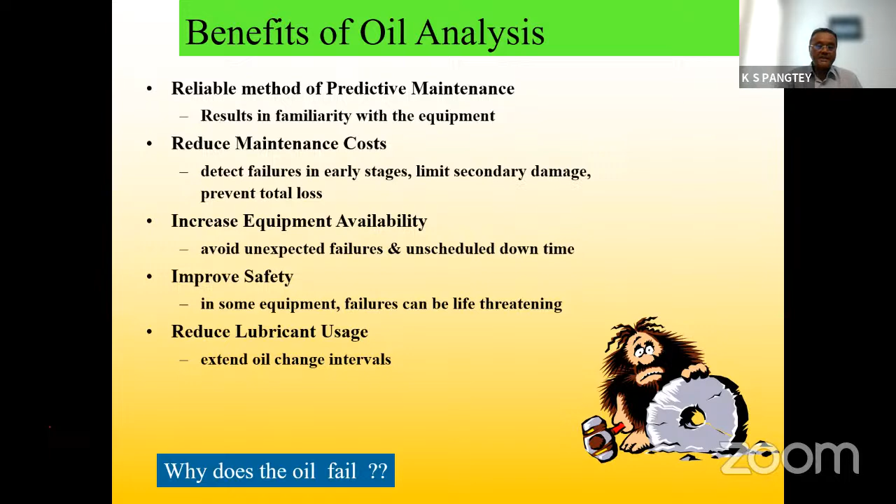Lubrication root cause - everybody knows lubrication failure, contamination, additive depletion, mechanical failure. As a mechanical engineer, my role is here - please see misalignment, faulty installation, overheating, many more. These are very small things which you have to look after. It might be in your maintenance schedule, but you have to slightly modify it as per the demand and requirement of the industry nowadays.

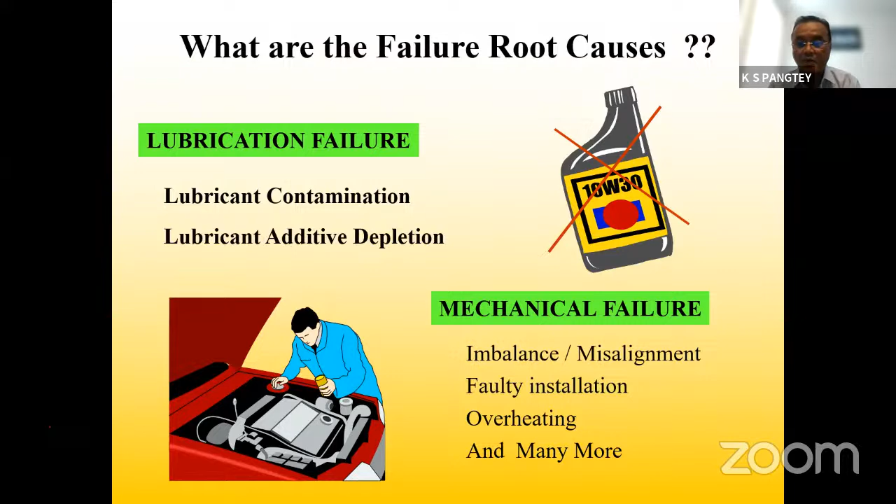Earlier, oil was very cheap, 50 rupees a liter, 40 rupees a liter. There was no problem. Industry is same, please mind, please note this. Industry is same, equipments are same, everything is same. From 40 rupees, today we are selling at 200 rupees a liter, because this is the demand, this is the time that has come. You have to look at all this oil, because oil means a lot - this is the heart of the plant. Oil is just like a blood sample report.

You have to see all the parameters. If something is happening, some elements are coming, something is coming in your oil which is not desired, then you have to look into this. Whenever I talk about this contamination process, machinery oils can be contaminated by a variety of materials that are measurable by oil analysis.

From the naked eye you cannot see, gentlemen, because this is not possible - soot, processed material, wear metals, water, glycols, fuel, processed chemicals, wrong oil - this is not possible to detect at your end. You cannot see it with your naked eye, because there is a special process and procedure needed.

You have to take help of condition monitoring. Ask your oil supplier, whosoever it is - I'm not talking about a particular industry, company or oil supplier - because this is your prime responsibility and prime requirement. You can ask before buying the product. Ask your supplier, can you give me condition monitoring for the product?

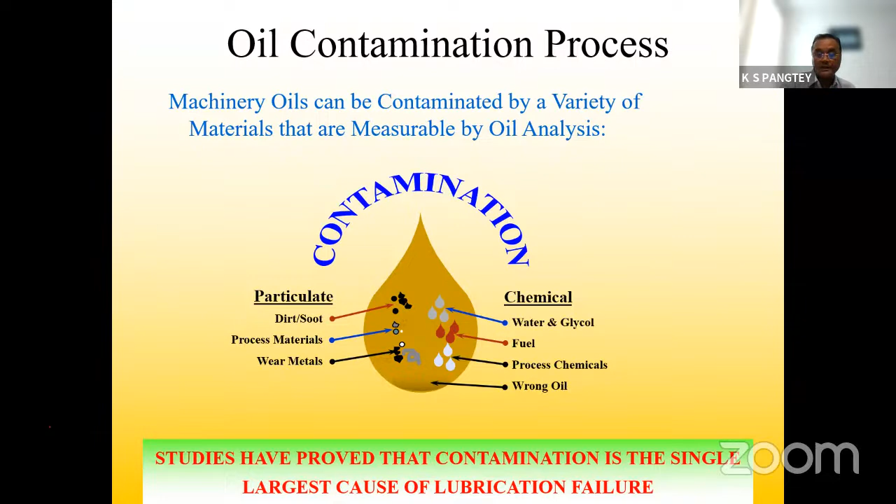If you are doing condition monitoring on a regular basis, you will come to know the health of the oil. There are so many issues, as I said earlier - additive depletion, viscosity index shearing, oxidation of fuel, sulfation, nitration, soot.

Now we are talking about CNG engines also. For general public knowledge, we work on the Otto cycle for MS petrol engine - spark ignition engine, and compression ignition engine. But all these CNG engines, they are also spark ignition, but they work on a different cycle - some call it stoichiometric cycle, some call it something different. But the efficiency of CNG vehicles is less compared to our petrol and diesel engines.

But these gaseous fuels - there is no liquid, so they run at very high temperature. So thermal stress - when I talk about stress, heat, everything is there, because there is no liquid fuel, so cooling to your wall is not possible. And soot deposits on the wall.

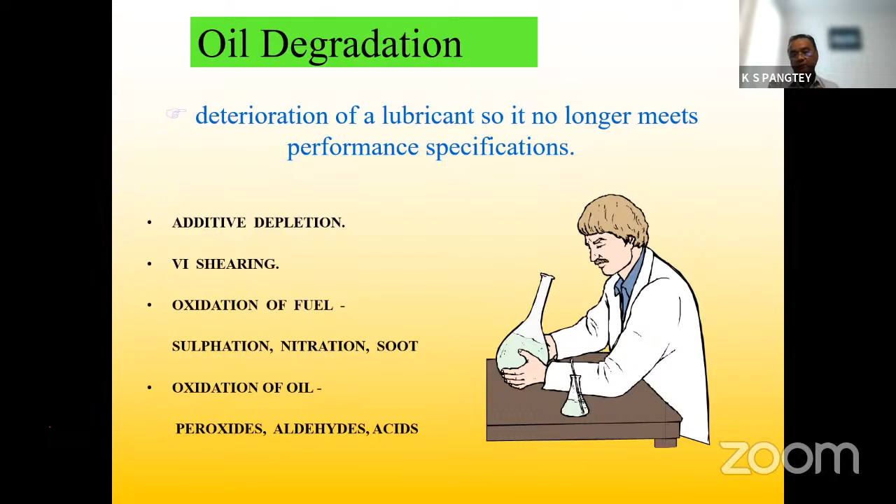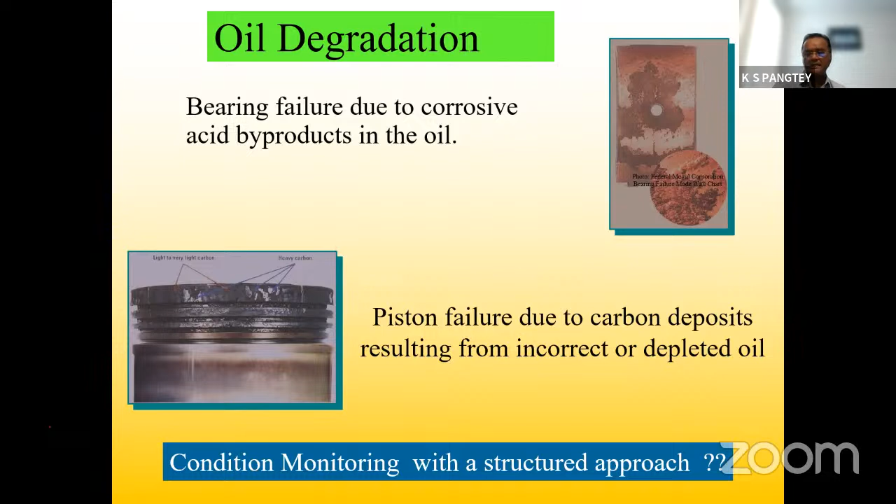This is a live example of condition monitoring in industries. See, bearing failure due to corrosive acid byproducts in the oil. See how these are taken care of by condition monitoring, because we come to know in advance. These are the worst conditions. You put your oil in the vehicle, in the engines, and if we have not taken care, these are the results - from thermal stress and thermal degradation, high temperature, everything is there.

Condition monitoring is not possible from the oil manufacturer or supplier alone. This is teamwork. Everybody has to take care - oil consumer, original equipment manufacturer, and oil supplier. The oil supplier is the only one doing condition monitoring, but without the support of oil consumers and OEM, this is not possible.

Now this is your right - you have to ask your supplier. You buy the product, so ask them, are you taking care of my turbine? My turbine consists of 35,000 liters of oil, gentlemen. This is costing me something around 70 lakhs of rupees for one turbine. I have seen a series of turbines, 5 turbines, 2 crores of rupees worth of oil. For every supplier of condition monitoring, please ask your supplier, ask your equipment engineer, because this is the prime responsibility of the supplier to take care of your equipment.

Mr. Sanjay was telling me, sir, now people are not taking care, oil suppliers are just giving the product and running away. No, this is the prime responsibility. As a citizen of India, this is my prime responsibility to take care of my consumer. I have to give them condition monitoring. I'm not talking about myself alone - when I say 'I', I mean the oil industry, oil supply, the prime industry.

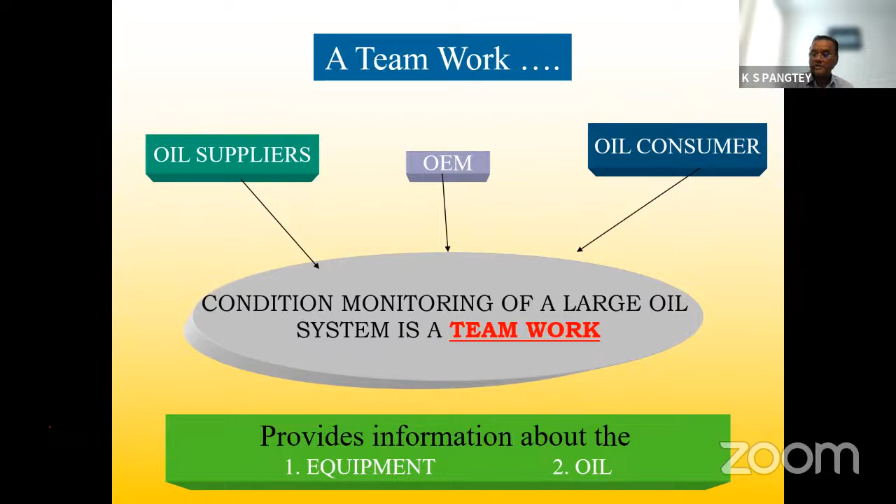This is a service you can demand from your supplier, because oil condition monitoring takes care of your equipment and oil. Oh God, just see - this is the process I was telling you about, everyone - the oil analysis flow diagram. I'll leave this here for just one minute, you just have a look.

How many controls are there? How many recommendations are there? This gives the complete example of whatever you are getting - iron, aluminum, chromium, copper, silica, lead, tin - everything is coming. Not everything comes from the oil; something is coming from your equipment also, your bearing also. Please keep in mind, whatever bearing is giving you separation of film to avoid metal to metal contact, this is in microns - you cannot see it even with your eyes.

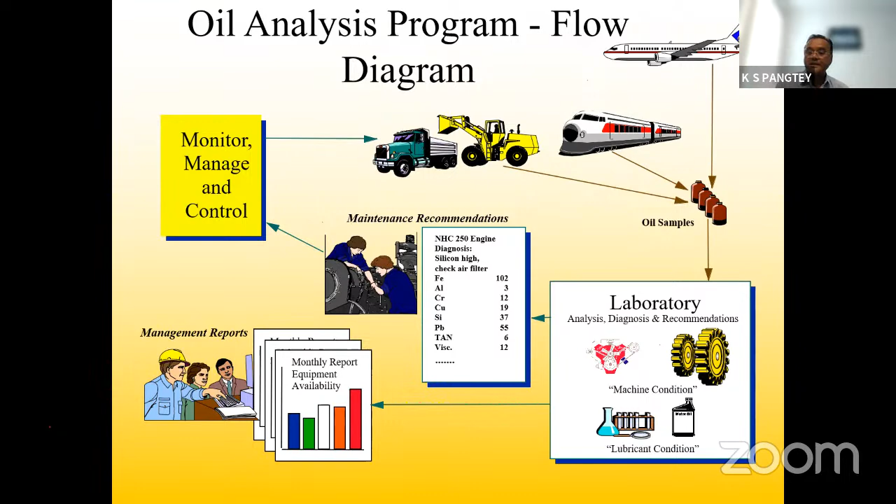Not possible to see directly. Condition monitoring is taking care of your health. Management reports are there, maintenance people are there, analysis are there, everything is there. For doing condition monitoring, you have to do condition monitoring scheduling - draw samples, draw vital parameters, do on-site tests, do lab analysis, and interpretation of test reports, because it's very difficult.

Suppose I give you one report - see, heart specialists are there, liver specialists are there, eye specialists are there. Everybody has specialists in the hospital. Like that only, in this oil condition monitoring report, if I give you a simple report, you won't be able to understand what I'm saying. Interpretation of results is very much required in an oil condition monitoring program.

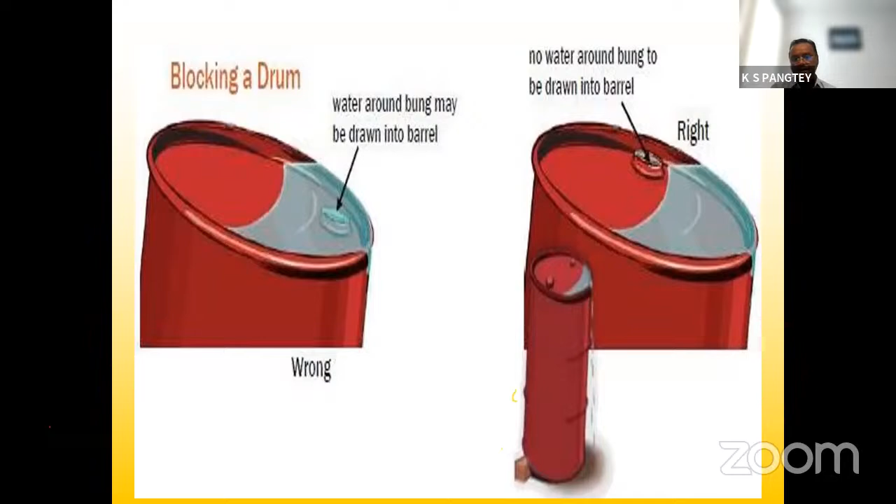All this water will come to your product. So the 3 o'clock, 9 o'clock position is important because, due to winter and the day-night cycle, some breathing is taking place. There is no way to take care of this or avoid it, except keeping the barrel at 3 o'clock, 9 o'clock.

Why am I saying this? Because of the bungs. There is one mini bung and one big bung in the barrels. So when you keep your barrels in a position where oil is filled up to the neck, there is no question of the barrel breathing. Your barrels are safe, and this is the prime responsibility and importance of the oil man: to keep the barrels in sound condition.

Grease barrels and base oil, lubricating oils consist of base oil and additives. So that position is important, but I am not keeping any grease barrel in the 9 o'clock, 3 o'clock position, because grease barrels consist of base oil, additive, and thickener.

Please keep in mind, it's not the grease itself that gives the lubrication effect, because greases also contain oil. Only the oil is lubricating your bearings and everything, wherever you are using the oil. Only oil is lubricating your product, your machines.

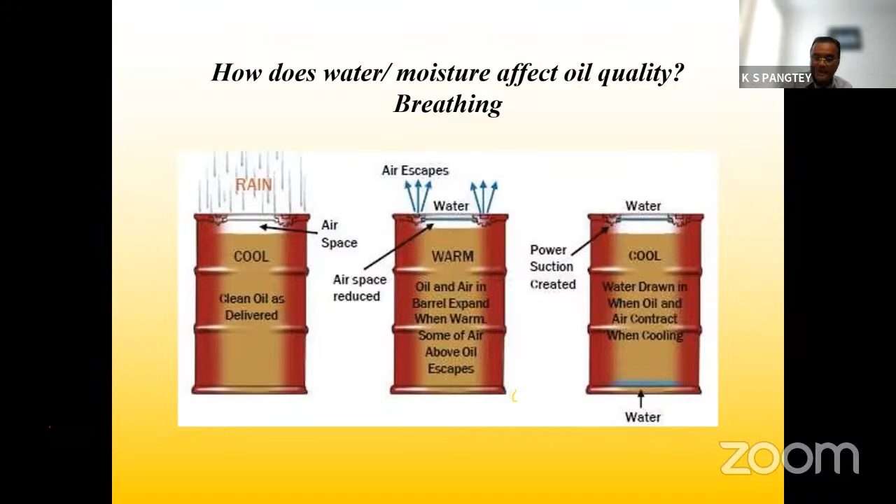Once you squeeze it out, because of stress and pressure we give to the grease, the oil ooze out from the grease, and that is what gives the lubrication. After that pressure is released, the structure forms again.

So whenever we talk about grease, we say once you keep the barrel at the 3 o'clock, 9 o'clock position, this oil will come out, and you will find only dry grease, dry soap left, because sodium, lithium - all these are soaps used to hold the grease together.

To hold the grease, to hold the oil, and with pressure and temperature, it comes out. This is the theory of grease, because people are not aware of how grease actually works. Whatever you see in grease, there is oil, and that oil is taking care of your lubrication requirement. That is why keeping the grease barrel in a vertical position, and the oil barrel at 3 o'clock, 9 o'clock, is very important.

In the industry you will find so many oils, and you have to segregate them. Hydraulic oil should not be mixed with automotive oil, quenching oil, or turbine oil. You should have one system in place so that whenever you dispense oil, it is only the oil you require for that purpose. Tag each container with the oil type - gear oil, automotive oil, industrial oil - so it becomes very easy for the oil man to segregate the oils.

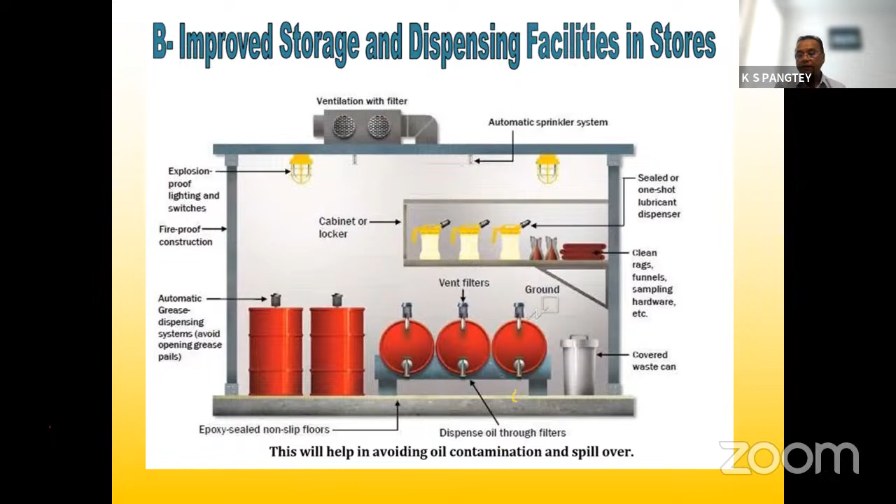I always keep a slide here for the benefit of the person. Please, when you are using proper oil management, the chances of contamination, oil failure, or mixing of the wrong oil are very low.

Just give me one minute, Sarita.

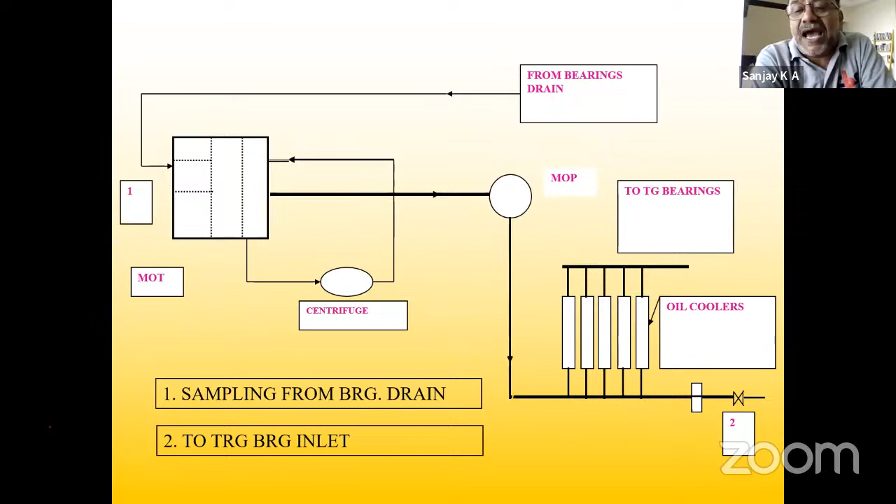You might have seen, Sanjay ji, Anshul Pandey ji looking at a slide very carefully. And he is not a mechanical engineer, but he understands everything. See what I am saying? True representative of the sample.

We don't want sample from here. This is main oil tank. This is your steam turbine. We are drawing sample from here, but most of the time here we are not drawing any proper sample, we are drawing water only. Whenever we draw sample from the main oil tank, we are drawing water, and you will find demulsibility characteristics is not up to the mark. When you send the sample to oil supply, he'll say your demulsibility is not proper.

This is for the industry people, for all. Everybody is having turbines in their plant, whether 40 megawatt, 200 megawatt, 20 megawatt, doesn't make a difference. We don't want sample from here. You have to drain your main oil tank on daily basis, otherwise your sample will not be a true sample.

This oil is coming from bearing drain, going to centrifuge, and from centrifuge again to main oil tank. From main oil tank, to main oil pump, to oil coolers, to TG bearing, turbo generator bearing, and again from bearing drain - this is the complete cycle, called closed cycle. You cannot do any alteration here, because this is design engineering. Steam turbines, these are all closed cycle systems. Oil is coming and going, coming and going compulsorily.

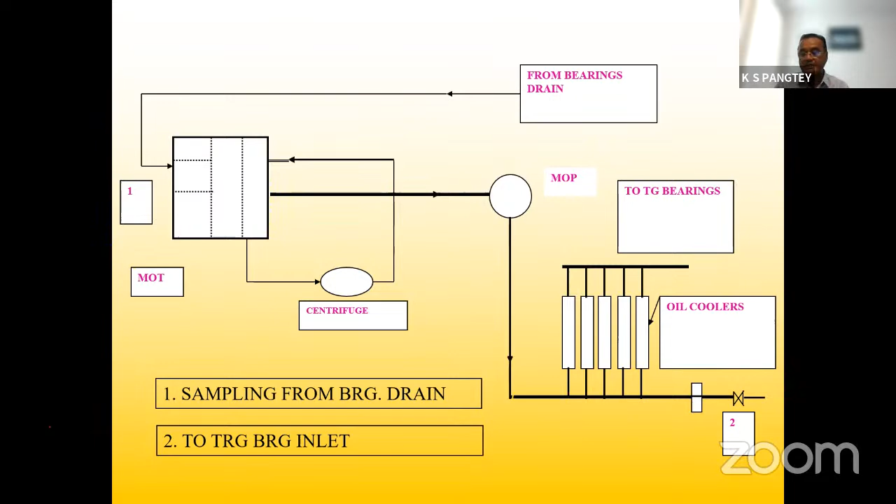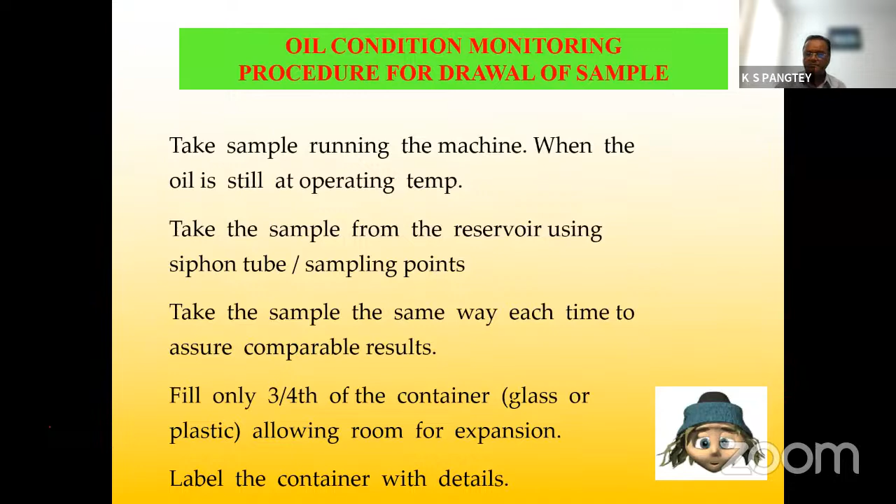Take sample when the machine is running, oil is still at operating temperature, from the reservoir siphon tube. See what I'm saying - whenever you are giving samples, please give samples that are not contaminated. Otherwise it won't be a true sample.

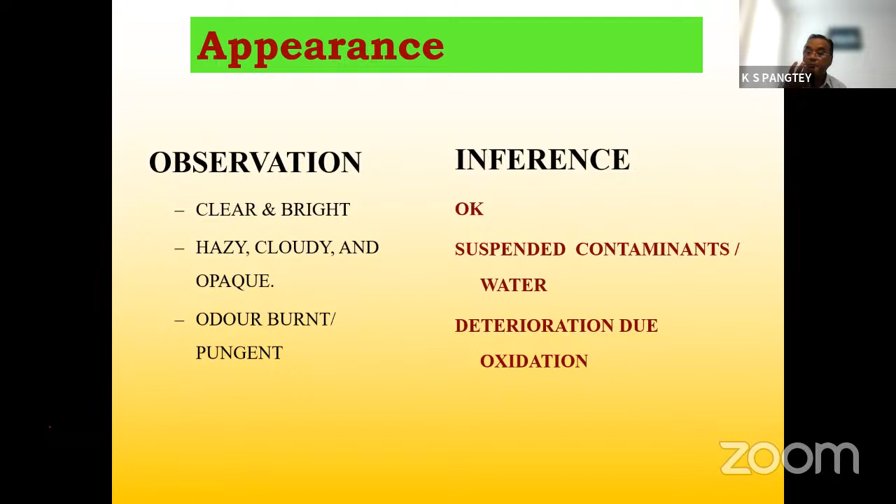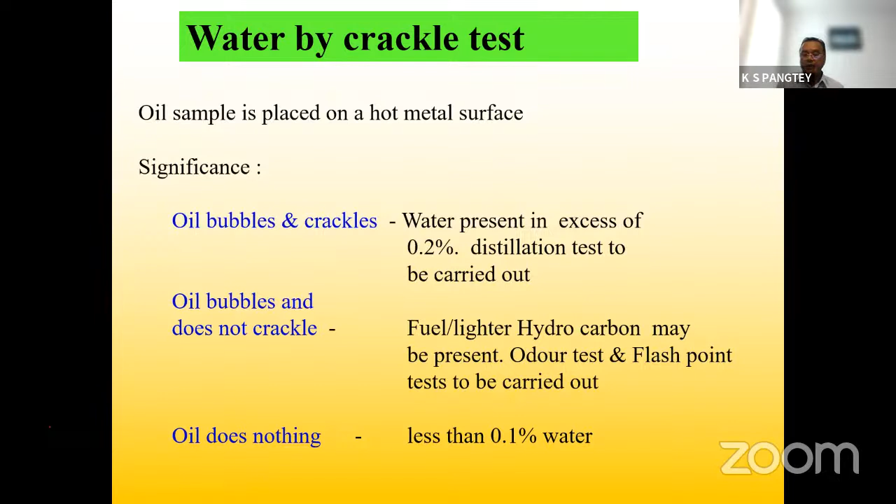See, these are the parameters - appearance, water content. This is what we do in condition monitoring. Clear and bright, if sample is clear and bright, okay. Hazy, cloudy and opaque means suspended contamination. Deterioration due to oxidation, you will find pungent smell, oxygen odor, burnt smell. Oil bubbles and crackling, water present in excess of 0.2% means distillation test. Oil bubbles are there, and water is always a culprit.

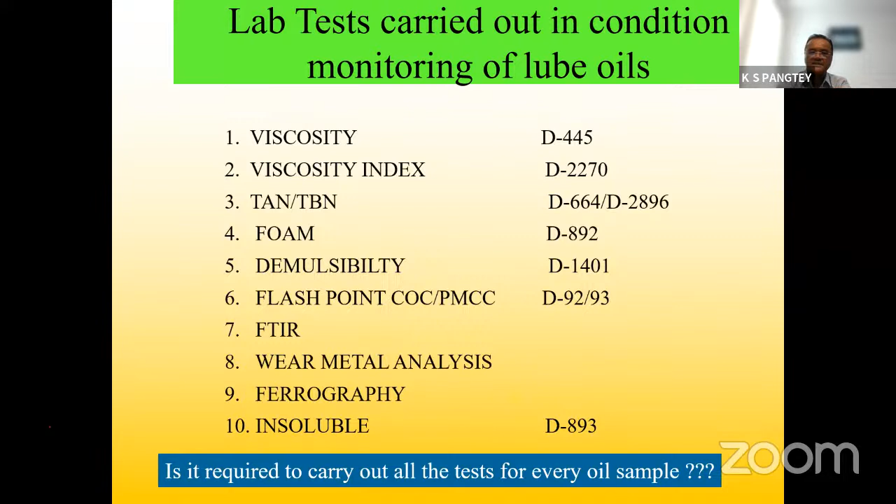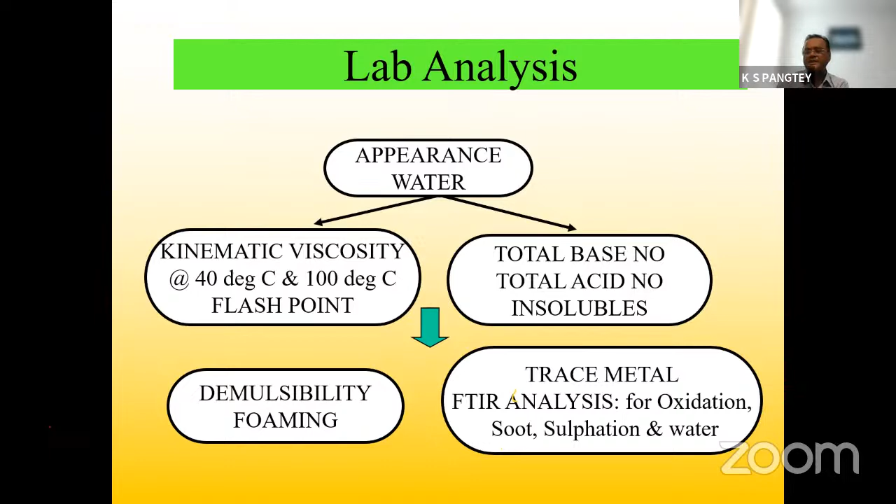These are the matters - you don't need to note this - but viscosity index, TAN, TBN, foam, demulsibility, flash. This is a whole complex problem. As a consumer, you cannot measure it. You can measure kinematic viscosity, TBN, small things, but to analyze the oil properly, you should have this kind of machines.

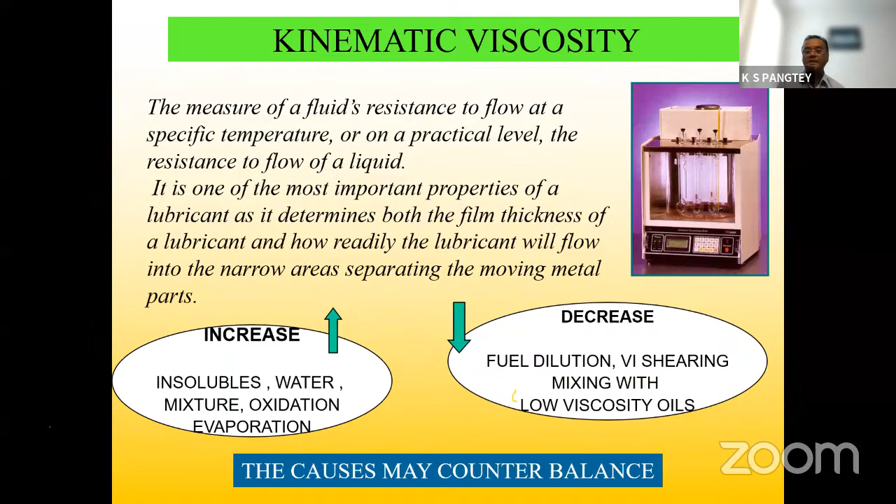Insoluble water, mixture, oxidation, evaporation - this will increase your kinematic viscosity. Fuel dilution taking place, VI shearing is there, low viscosity oil is there - then viscosity will be decreased. These are a few small tips that are very much required in industrial practices.

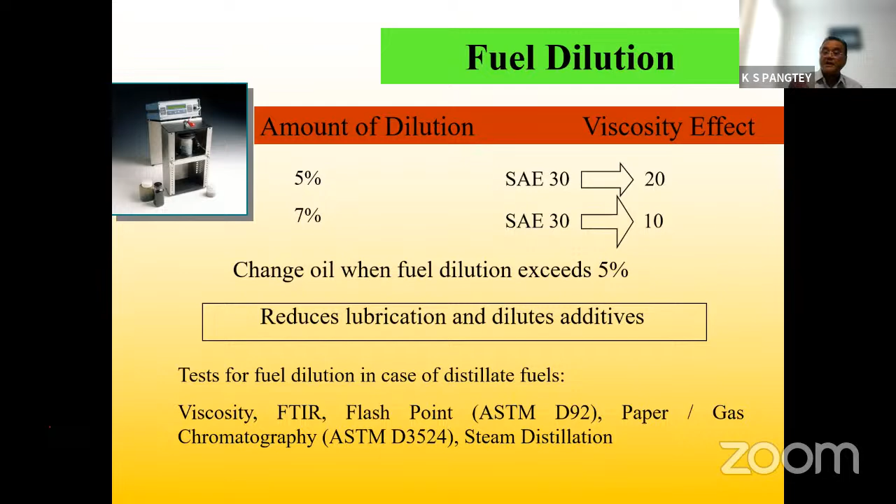Fuel dilution is taking place in most automotive oils. You have to avoid this because it will reduce your lubricity and lubrication, and your machine will run hot. With condition monitoring, we will come to know so many things.

When we talk about industrial oil, we talk about TAN, total acid number. When TBN is decreased by 50%, we replace the oil.

In machine diagnosis, what we see is overheating, overextended drain interval, improper oil type, moisture in oil, high metallic contamination, and antioxidants. All the additives are subjected to thermal stress and thermal temperature. A lot of stress is taking place, thermal degradation is there, everything is there. But you can't avoid it, because this is the nature of the machine. The machine will work like that only.

In automotive oil, low TBN is there. My oil has to run for 10,000 hours, but suppose I have run it for 14,000 hours — what will happen? This is called extended drain, overextended oil drain. Your engine will go bad. You will not realize that after running for so many kilometers, you have given stress to your engine.

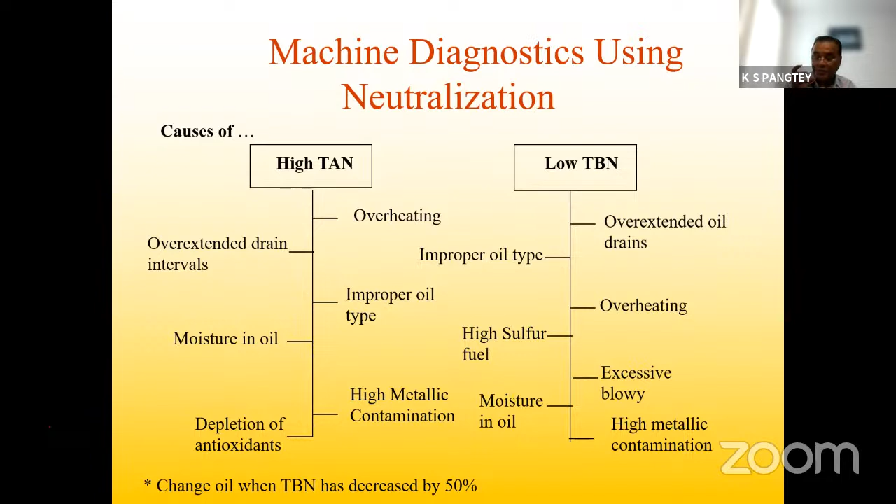Improper oil causes problems again. Overheating will take place, high sulfur fuel is consumed, and blow-by occurs in the automotive engine. So insolubles, oxidation resin, carbon, and soot result.

There are so many parameters. Some of these are coming from the oil, and there are parameters that are coming from the engine.

You have to find out about your equipment. Extraneous matter — carbon, soot, particles, dust — everything is there. These are insolubles. Whenever you do this analysis, you will find the amount of oxidized product: hexane insolubles, carbon, soot, wear particles, and dust. Wear particles are not coming from the oil, and dust and dirt are not coming from the oil.

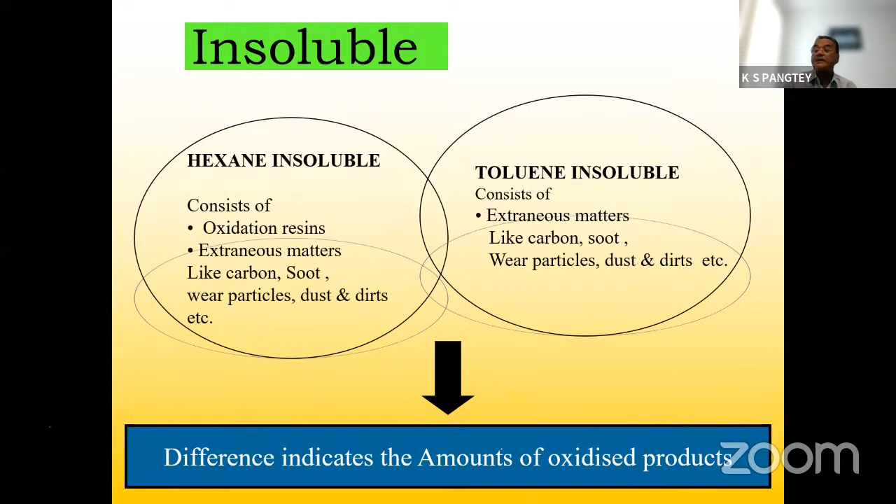These are coming from the machines. We have to identify which parameters are coming only from the oil, and which parameters are coming from the machines.

These are very important. We don't want water. Water is the enemy of the oil. Whether this is automotive oil or industrial oil, water is highly corrosive. We don't want water, so we must take care of how water ingresses — for example, through leakage in water coolers in a circulatory system.

You will come to know this only through condition monitoring. There is no other method. There is no supplier in the world, and no maintenance engineer, who can tell you where your water is coming from.

Steam condensation is taking place in the turbine — you cannot avoid this, flue gases are there. In automotive oils, water comes due to condensation of flue gases, because you cannot avoid it. This will come, but there are limits. There are certain limits, and you have to work within those limits only.

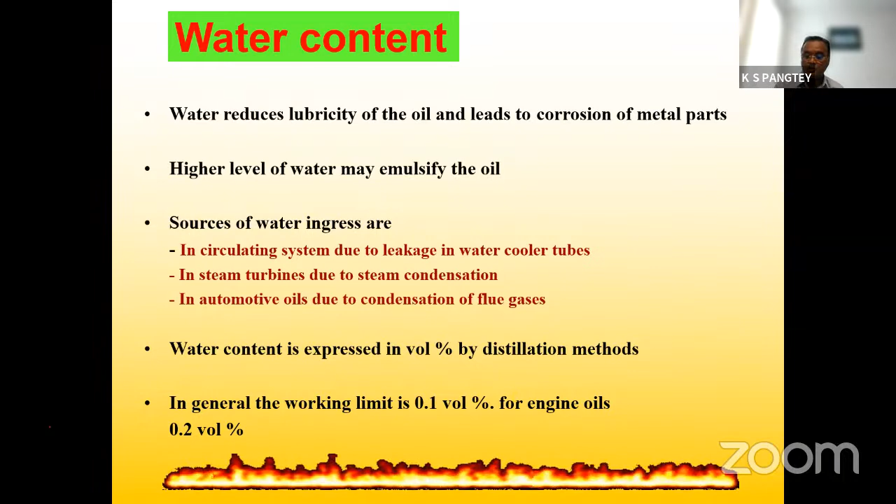So, my dear industrialists, what I am saying is I was talking about anti-foam agents. Foaming is not required. I give this anti-foaming agent to take care of industrial oil so that it does not foam. Foam should not be there.

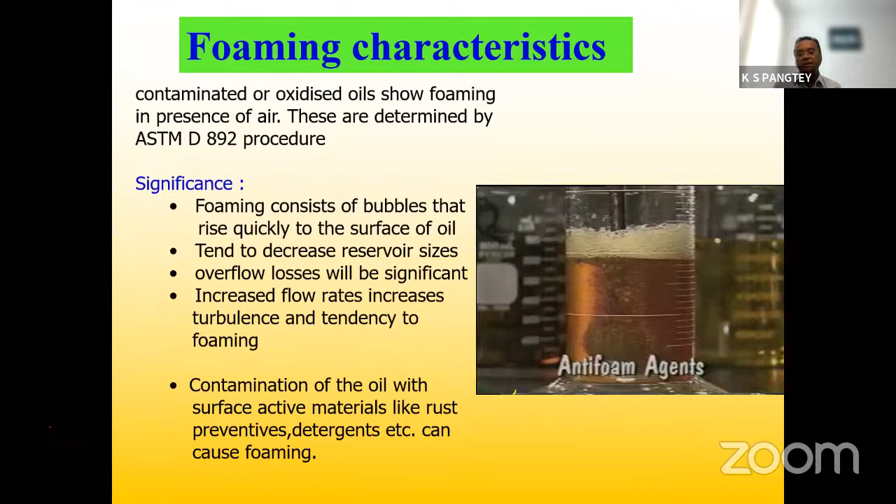But if you take the wrong sample, this will happen. These types of foaming will occur because of excessive doses of additive. This is of paramount importance in the oil.

Just keep in mind two things. Demulsifier is the heart of the industrial oil. I don't want water — I want a product that gives water repulsion. Water should be repelled.

After a certain interval, we do what is called a demulsibility test. Suppose oil is there and water is there — after 20 to 25 minutes, using this method, the water and oil should separate due to density difference. Any lubricating oil in the world has a density less than one, so you can drain it and the oil is as good as new.

But just opposite to this demulsifier, there is one more type — this one does not work the same way.

This is called emulsifier. We don't want water there. We want repel characteristics for the industrial oil — repellent should be there.

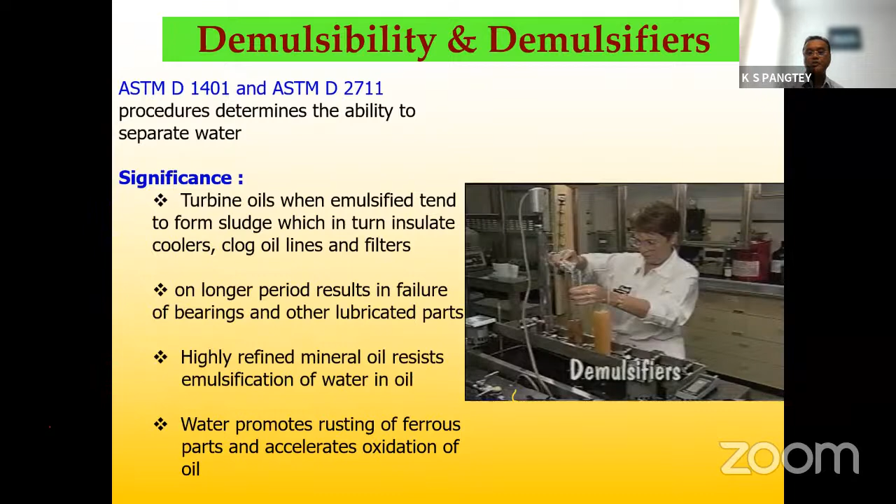इमल्सिफायर क्या है? This is the characteristic to mix the engine oil with water. Suppose we are running in the field, water comes, heavy raining is there. My engine has some water contamination. For the next garage, for the next destination, water should be in the emulsified condition so that my vehicle, which is costing around 1.5 crore, 2 crore, 3 crore, doesn't get affected, and all the characteristics of automotive engine oil, we get it from the engine oil.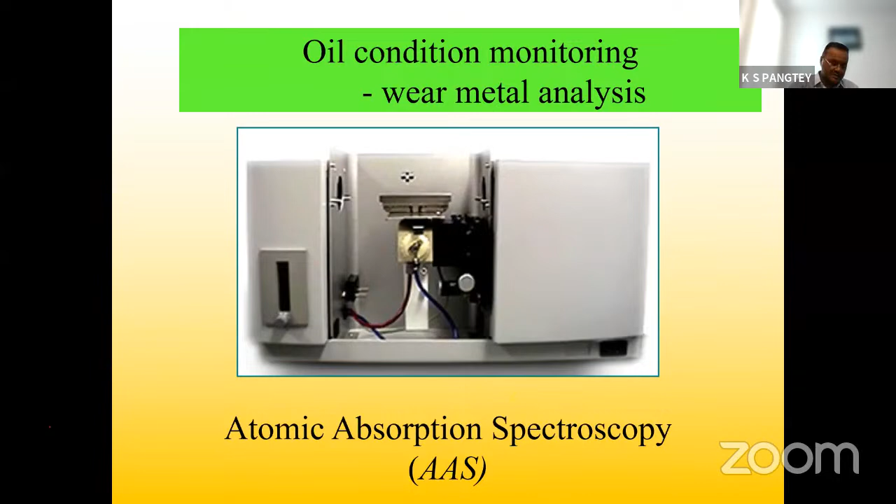Gentlemen, all the participants here, all the industries, they are having this kind of instrument. And for the industry, putting these 4, 5 crores, 10 crores of instrument is not desirable, not required also. Take the help of your oil equipment manufacturers, oil supplier, they'll do the condition monitoring for you. This is your right. You have to ask for it.

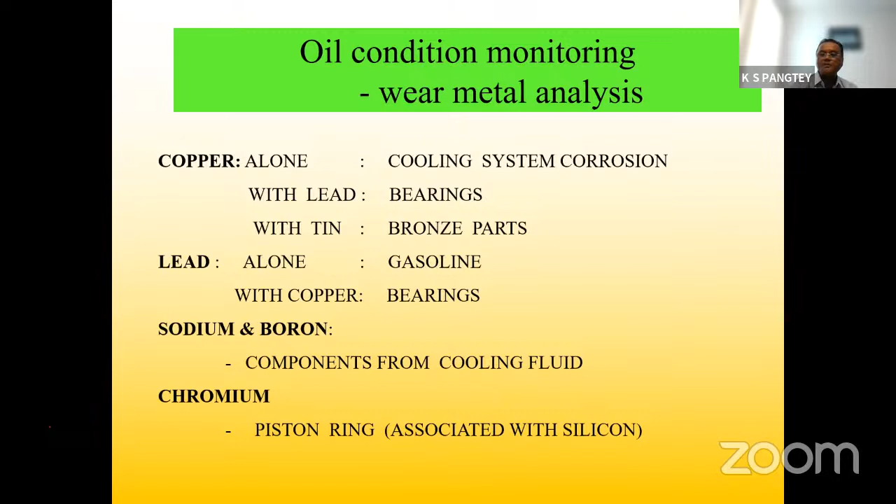There are some contaminants, those are coming from piston rings, chromium, cooling fluid. Suppose lead is coming from bearing, and some is coming from MS petrol. Again, lead is coming from bearing, bronze part. Tin is coming from bearing liners, bronze part, silicon is air induction system. Those are not part of the oil.

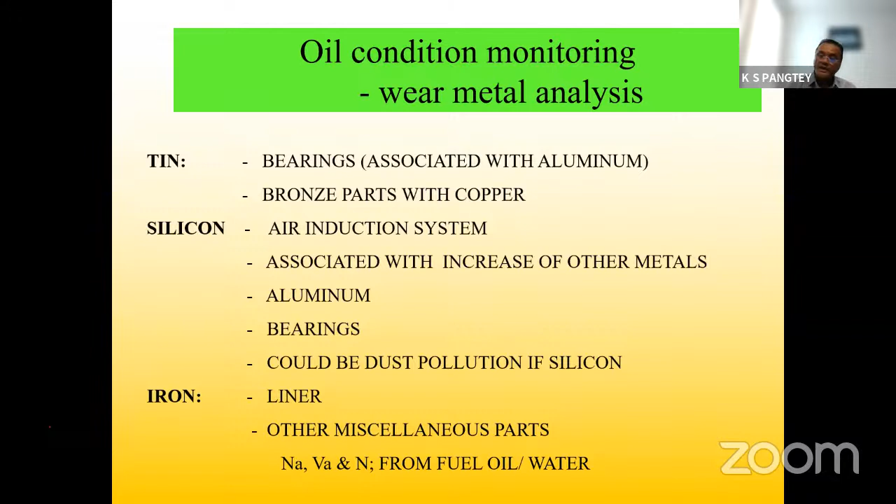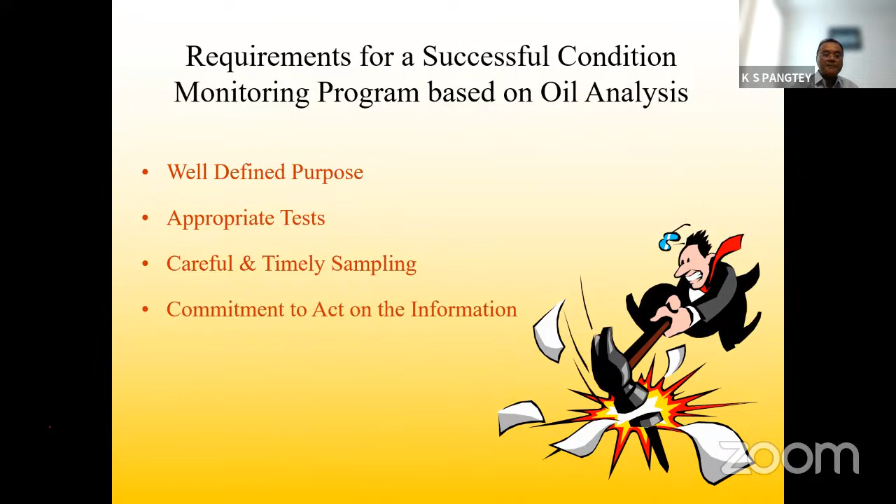You have to understand which part is giving you the problem, oil or equipment. Equipment gives problem only when we are not doing the condition monitoring. We have to define the purpose, appropriate test is required, commitment to act on the information. We have to take care of everything.

As suggested by my dear friend Sanjay ji, I have not taken much time, and I have finished my lecture in the defined time period because people are curious. We have not given them time to understand and question. So question and answer will take place after the lecture of Dr. Anshul Pandey. And I request Dr. Anshul, please cover this condition monitoring parameters, because I'll take 5 minutes more.

As an oil supplier, as a condition monitoring equipment industry, original equipment manufacturers, oil supplier, we are working on certain environment. But the customer is not aware when to give sample and where to give sample and which is the best time, how to take sample, because he's not getting any alert message. In this competitive scenario, today's scenario, everybody is looking to reduce per metric ton cost, to look after their better maintenance practices, everything.

But if he is not aware where to give, when to give samples, how to give samples, no alert is coming, because people are working on this alert message nowadays. Unless and until I get an alert message from my mobile provider saying 'your payment is due', I'll not give any payment because I'm not aware, because back of the mind, I'm not aware when to give. We get an alert message, sir, your payment is due, you have to do the payment.

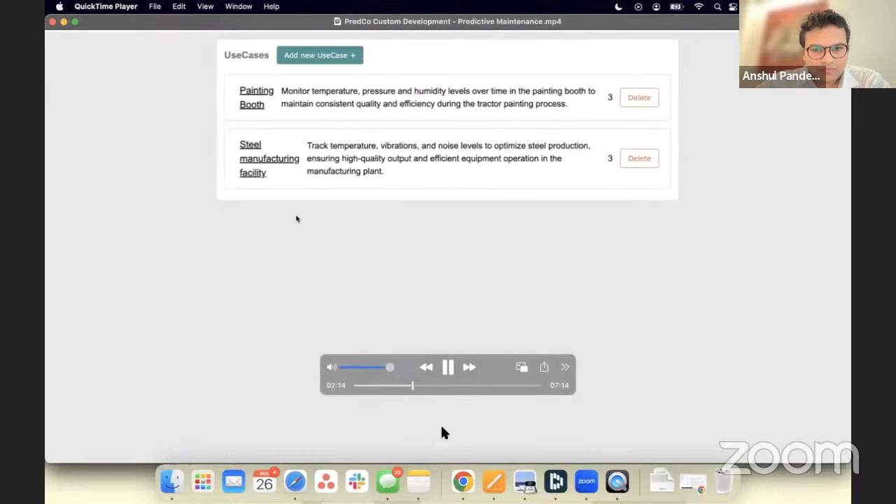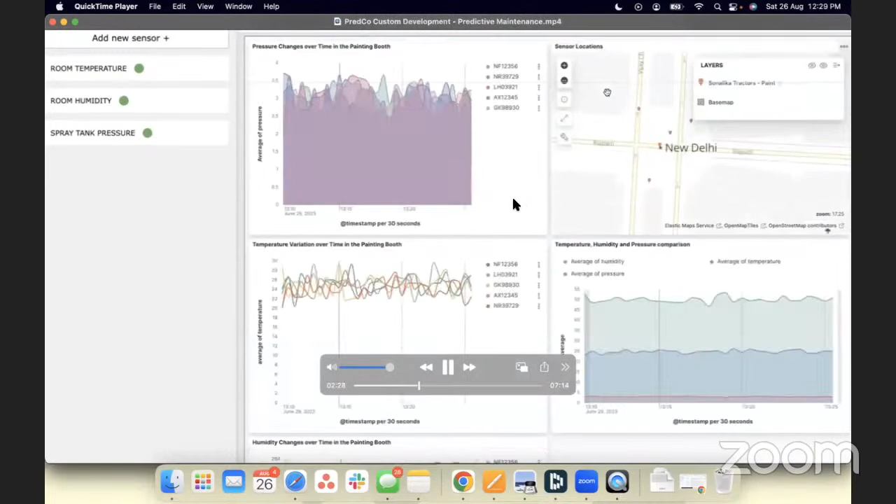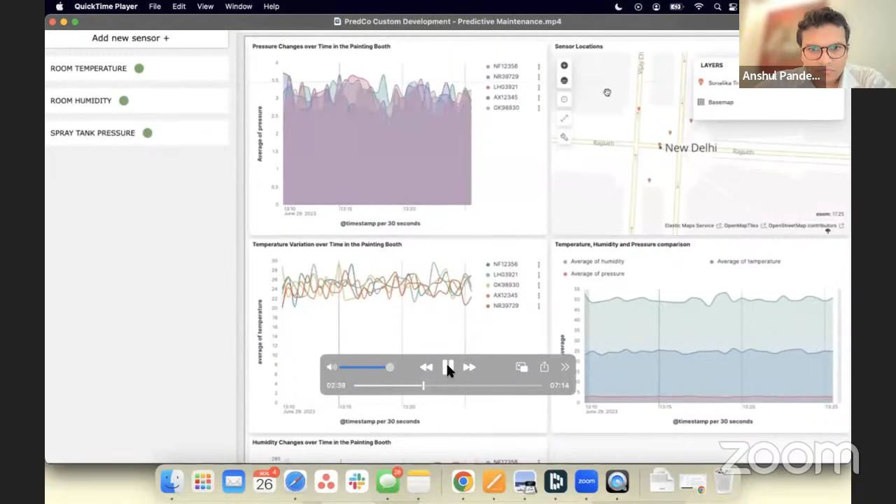So as you can see, there are a few very useful charts that have been displayed to you right away. These charts are showing the data that we have been receiving from the different locations for the sensors. One thing unique about this particular client was that they already had these machines with installed sensors, so we didn't really have to install external IoT devices. The second demo that I will show quickly is where we actually brought our own devices as well.

Right now, this use case is configured to capture the data for temperature sensor, humidity sensor, and the spray tank pressure sensor, which are the most commonly used sensors in case of a place performing any painting kind of work on top of any equipment.

So there you get lots of these kinds of charts that come out. Let me just now go quickly to the second demo, which is this one.

Welcome to the demo of PredCo Predictive Maintenance Platform. So this is our login screen. First of all, we need to enter our username and password and log in into the PredCo Predictive Maintenance Platform. So this is the second one.

The first one was a custom development that we had to do because they did not want a cloud setup. They wanted something that would run in their data center.

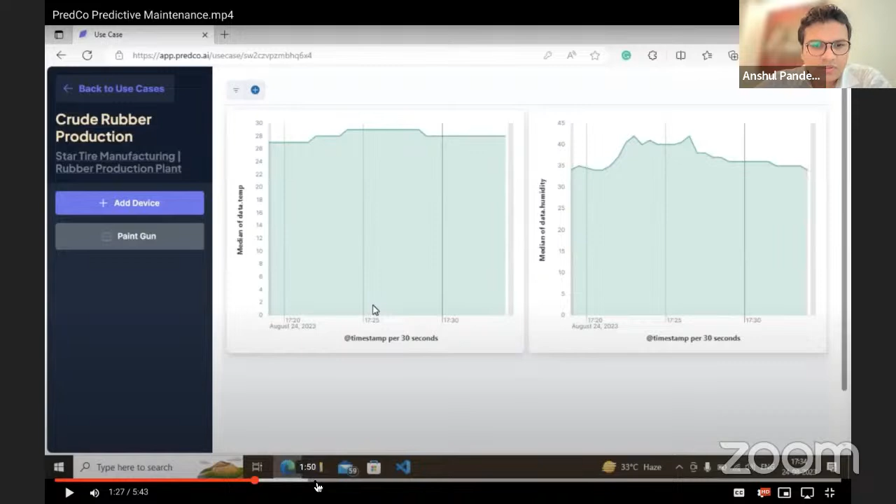Now let me show you quickly how the alerts get created, because I think that is one of the most interesting parts here. So here, like we had an example of our own device that was getting set up, you can also create watchers. Watchers are a feature where you can monitor your parameters of your machine. You can set thresholds on the various parameters of your machine. In our watchers feature, we can create two types of watcher basically: threshold based watcher and anomaly detection job.

So what that means is, up until now we have taken data from the sensor. It is coming on a dashboard. Now you want alerts issued to you. The alerts could be of two types. One is you want the system to automatically figure out what kind of anomaly or important, interesting situation is happening. The other is you have your own domain expertise - you believe that humidity should not go above this level, or water level should not go above this level. So the first one is the threshold based watcher, where you bring your own domain knowledge and you just set it and leave it. Anytime that threshold is breached, you get an alert. Second is the anomaly detection, where the system is doing it all by itself - you do not need to be involved at all.

Threshold based watcher, in that you can create thresholds, upper threshold and lower threshold, and you can create an action on behalf of that. And you can also have an anomaly detection job that uses advanced statistical models to define anomalies.

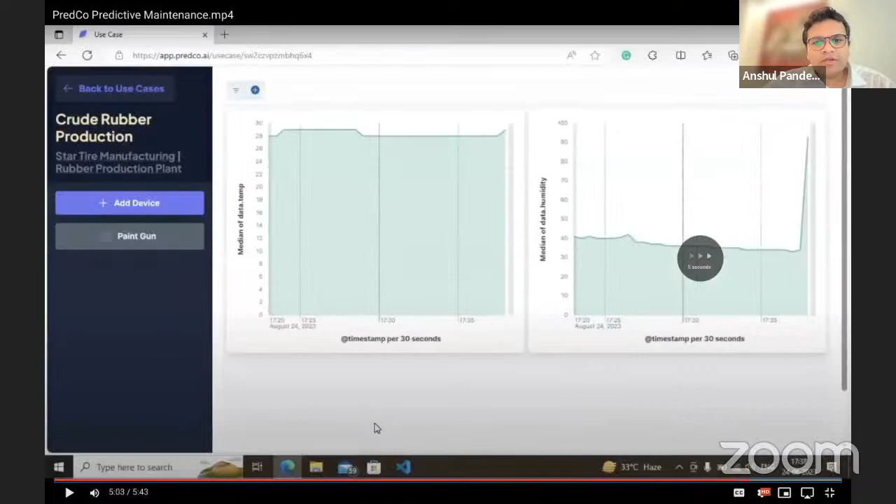Now you define who should get alerted anytime this particular situation is happening. That is the situation that you can essentially monitor. You can even send messages around what needs to be done when certain types of alerts are issued, right? So that is a very quick demo of the predictive maintenance component.

Let me come back very quickly. I know I do not want to go too over time, so I'm going to leave the inventory management part for now. Maybe I can come back if we have time further. But there is an inventory management component which again does this.

It has support for tracking where the inventory is going. You get an alert if the inventory is going down or above a particular threshold. It's more for operational efficiency. Let's say you have multiple warehouses with inventory spread across them, you should be able to know where the inventory is.

So just to segue and then I'll wrap it there. How much time does it usually take? Because that's another point Sanjay sir made, right? Speed is important. Honestly, it depends.

There was a custom development that we did, and even though it was custom, my client already had CNC machines that were able to capture some data. So the whole development, with the first pilot launched, took around 3 to 4 weeks. In 4 weeks, we were actually on the ground to say, okay, this is the setup that we can offer you.

What we do is our process is to first do a preliminary survey about what is the requirement, what are the available solutions out there, and where the convergences are. Then we do a site survey, and then the execution. So I would say anywhere between 3 to 4 weeks to about 12 weeks, 1 to 3 months is usually the turnaround we generally expect for a first pilot to be deployed on the ground.